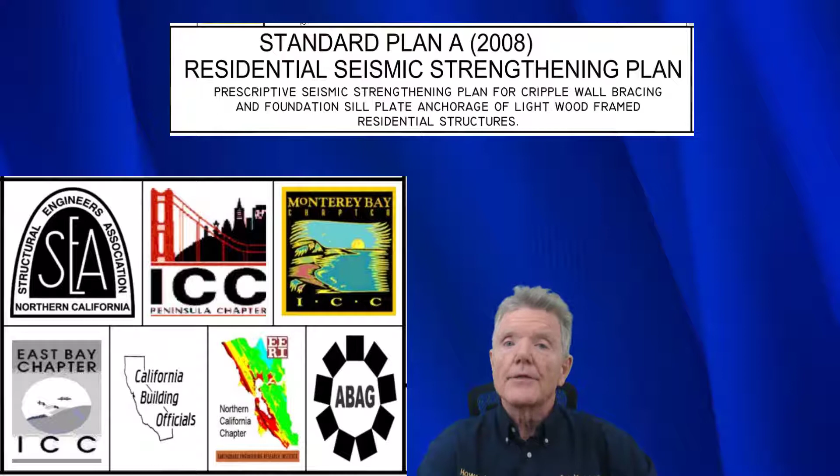I'd like to point out this is a very, very important document. It's been used by the California Earthquake Authority. The city of Berkeley also finances retrofits with this. The city of San Leandro teaches a course to contractors and homeowners, and it's used throughout the Bay Area. The city of Hayward actually is starting to require its use.

It came out about 2006, so it's been almost 14 years that it's been used extensively throughout the San Francisco Bay Area, and literally millions of dollars has been spent, much of it public money.

So if tens of millions of dollars are being spent by the public as well as by private individuals to protect their homes using this particular standard, you would really want to make sure that it is as effective as it can possibly be. The purpose of this three-part video is to see if it is as effective as it can be and if it needs any improvements.

Right now, we're going to go over some basics. In order for you to understand Standard Plan A, you need to understand some basic concepts. So we're going to go over what foundation bolts do, what plywood does, and also something called shear transfer ties.

Once you have that basic information, then I'm going to compare two houses. One of them I'm going to use Standard Plan A, and one of them I'm going to use a custom design system, which is what we use. The Standard Plan A one, you're going to see how it takes almost twice as many retrofit components compared to one that is custom designed like we normally do, and it's based on science.

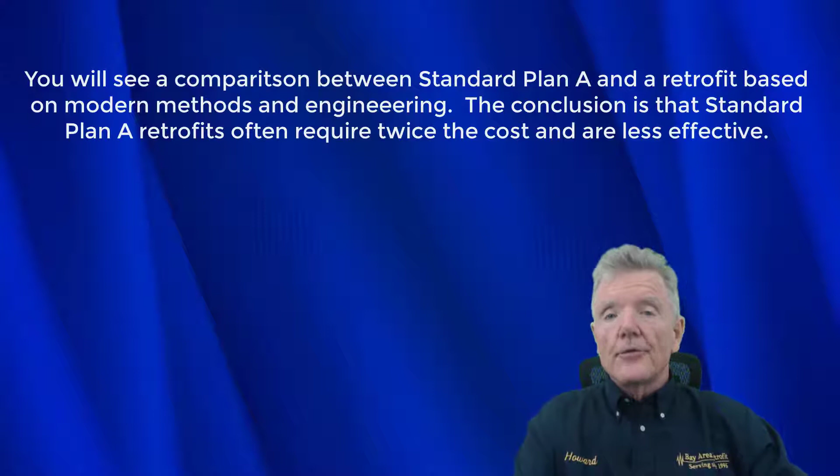Then for the rest of the video, which is about 25 more minutes, it's pretty long, I'm going to show you the science behind what I'm telling you and why, and I'm going to prove to you that what I'm telling you is true. So let's go ahead and take a look at the basics, and we'll go from there.

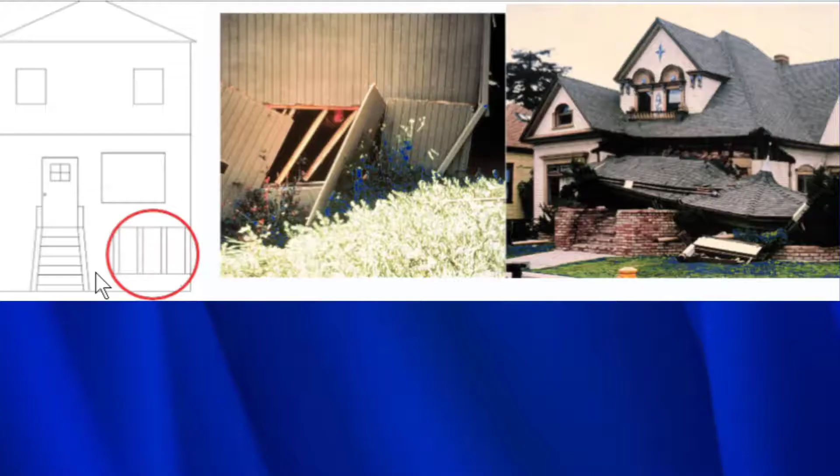The main purpose of Standard Plan A is to prevent the damage to homes that have cripple walls. Cripple walls caused a lot of damage in previous earthquakes when they collapsed. A lot of people became homeless, a lot of people lost their lifetime savings. I'm going to show you exactly how Standard Plan A attempts to do that.

First we need to understand what a cripple wall is. This wall right here is a cripple wall, and it's a wall that's between the foundation and the floor that you walk around on, and if they collapse, you can end up with this situation right here. This is the floor of the house where you would be walking around, and it's rocking back and forth like that.

Let's say the house weighs 100,000 pounds. It rocks back and forth, and it just can't handle that much weight rocking on top of it, so the wall collapses. The point of a cripple wall retrofit is to make sure that this wall is strong enough so that it does not collapse like that and keeps the house attached to the foundation.

Now, this is what happens when they fall off the foundation. You can see here, there used to be a set of stairs that go up here to the front door, but the floor is actually way down here, so you can tell it probably fell 3 or 4 feet off of its foundation.

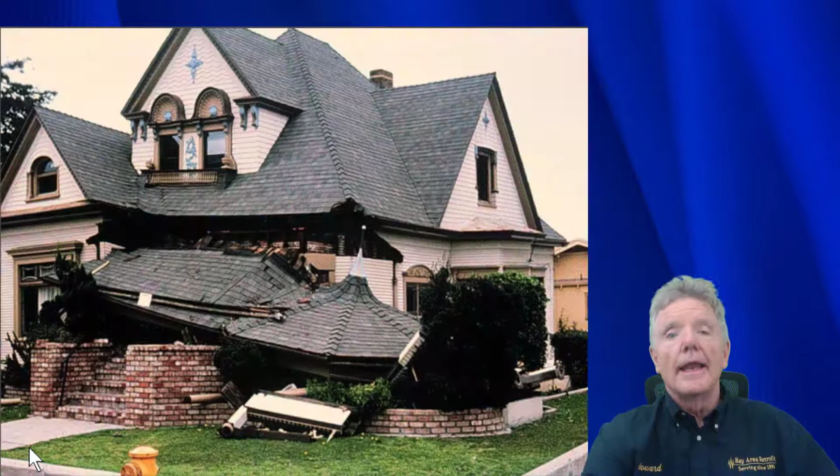This house right here, actually, I was the FEMA inspector who came in and looked at this house after the 1989 earthquake, and it was a big mess. The plumbing was torn out, the plaster was everywhere. It was obviously just really screwed up, and it was even more screwed up on the inside.

And so I went over and did the documentation I had to do, and then I came by a week later and the house was gone. They had bulldozed it, hauled it away, and the people who had lived there, I don't know what happened to them, but there's probably a house there now, but they lost it.

The point of Standard Plan A, and these government bodies putting Standard Plan A together, is to keep homeowners from having to go through this ordeal by giving them something simple to work with that uses the plywood, bolts, and shear transfer ties we just looked at in an intelligent way, to make sure they can get their houses retrofitted properly.

So we're going to look at basically what they're trying to do, and then primarily we're going to look at the plywood connection, because that's the number one factor in a good retrofit is a good plywood connection, and most of this video is going to be about that.

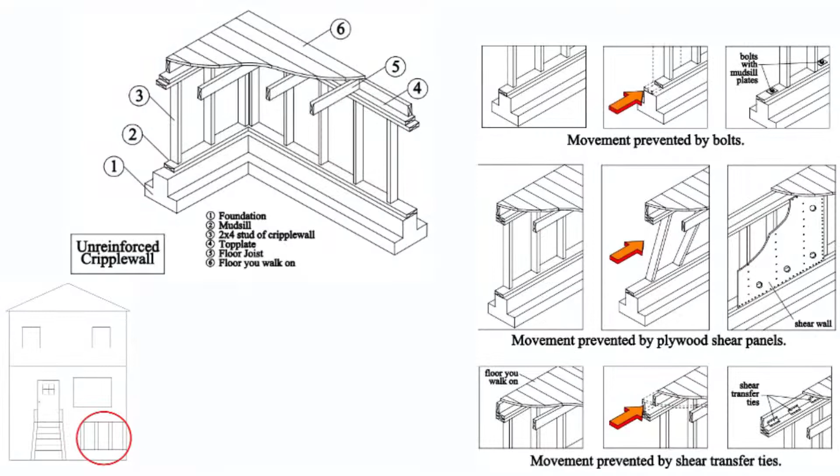So right now we're going to go into the technical parts of Standard Plan A. Remember, this right here is the cripple wall, and we're going to try and keep that from collapsing. Now this is the cripple wall in its entirety, if you were to be underneath the house looking at it. Here's the floor that you walk around on. This is the cripple wall itself, and this is the foundation.

We're worried about this piece of wood right here sliding on top of the foundation, and we fix that with bolts. The other thing we're worried about is this piece of wood called a floor joist sliding on top of this piece of wood, which is called a top plate. Now let's go ahead and see how that's done.

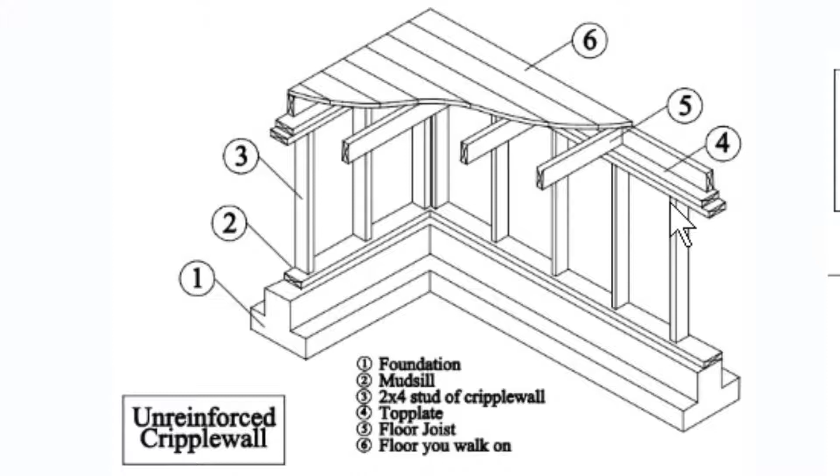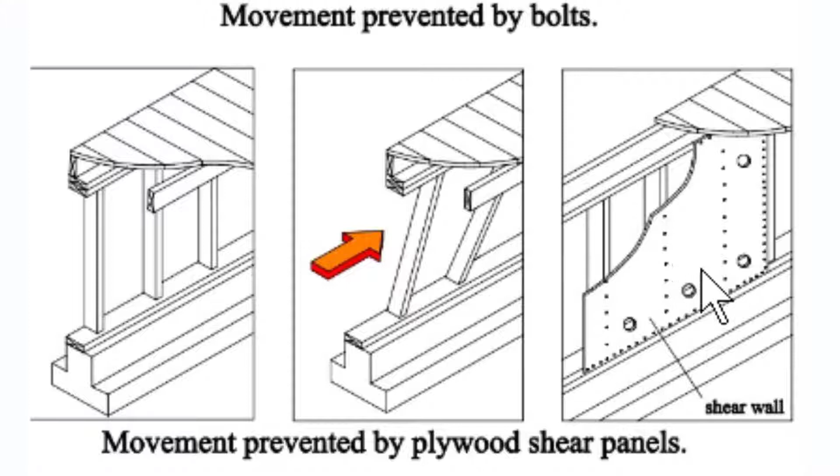So if you come over here, you'll see that here's the cripple wall. It's just standing there like it's supposed to. Then the earthquake force comes this way and it tries to knock it over like that. And it's a pretty easy solution: all you need to do is put some plywood on the cripple wall, and that solves that problem.

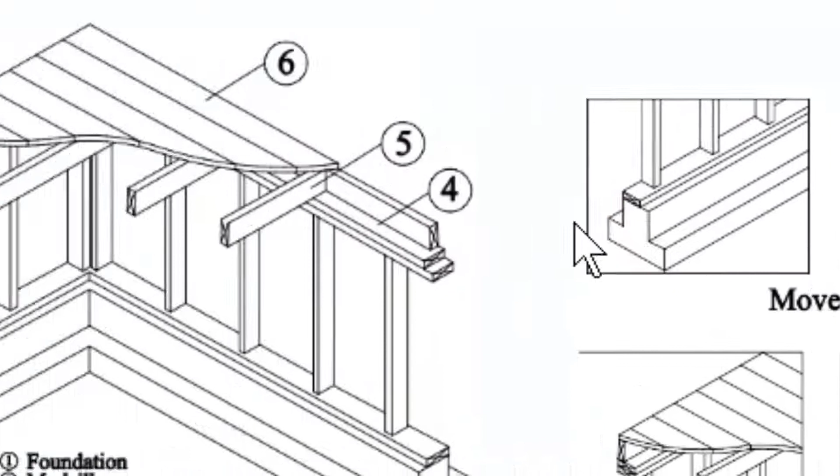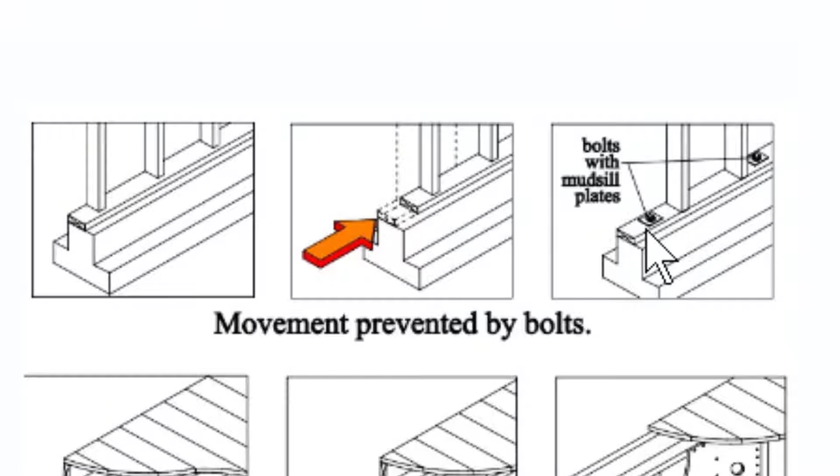Now the next one we have here is the bolts. So this is the mud sill, it's just sitting right here, as you see it right here. Remember, that's the bottom of the cripple wall. Earthquake force comes this way, tries to push it off like this, and then we simply bolt it to the foundation. Now on the top, we have the same problem with sliding.

So here's the floor you walk around on. This right here is the floor joist. And we want to make sure that when the earthquake force tries to push against it, it can't move. You see how this dotted line shows how it's moved a foot or so. We want to make sure it doesn't move.

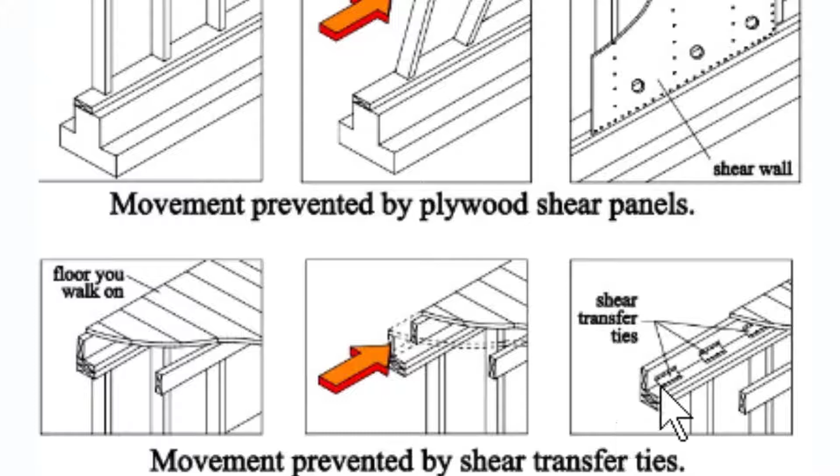And so we use these, called shear transfer ties. You can see right here, that's a piece of metal here, and a piece of metal here, and a piece of metal that will keep that from sliding when an earthquake hits.

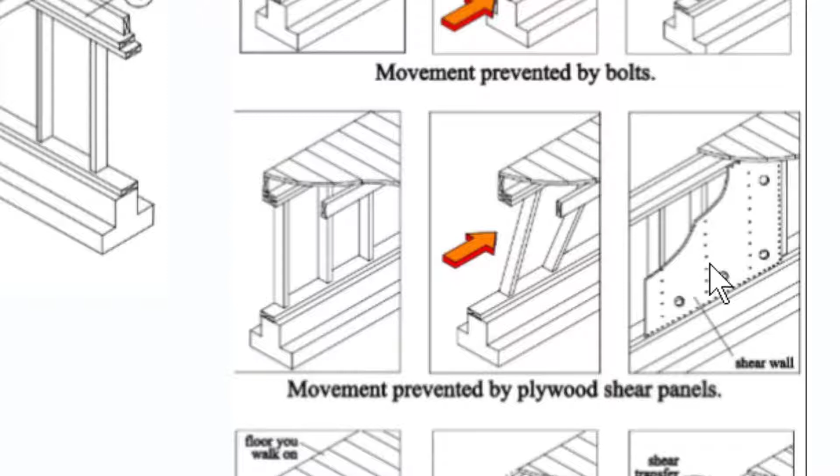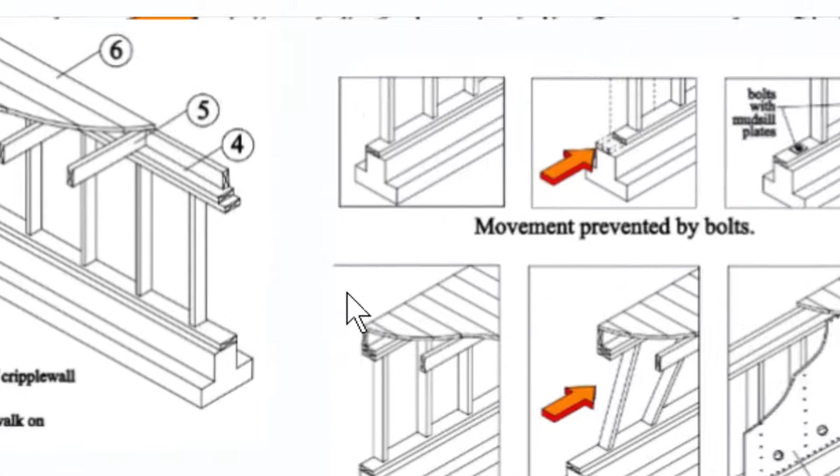So in summary, we're going to keep the cripple wall itself from collapsing by putting on plywood. We just nail some plywood to it. The next thing is we're going to keep our cripple wall on top of the foundation by bolting this piece of wood, called a mud sill, to the foundation. We do that right here with the bolts.

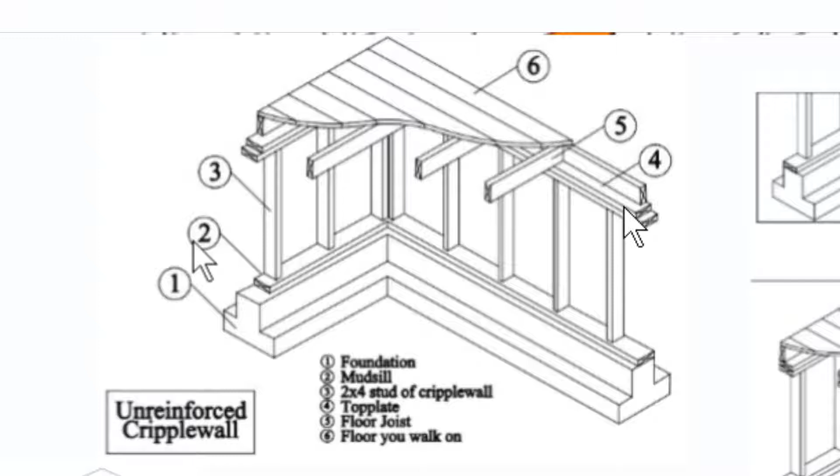And finally, we're going to keep the floor, which we're worried about moving on top of the cripple wall, by putting pieces of steel right here, connecting this piece of wood to this piece of wood, as shown right here with the shear transfer ties. Now Standard Plan A gives us a system by which we can take any house and figure out precisely how many linear feet of plywood we need, how many bolts, and how many shear transfer ties. We're going to go ahead and look at that part right now.

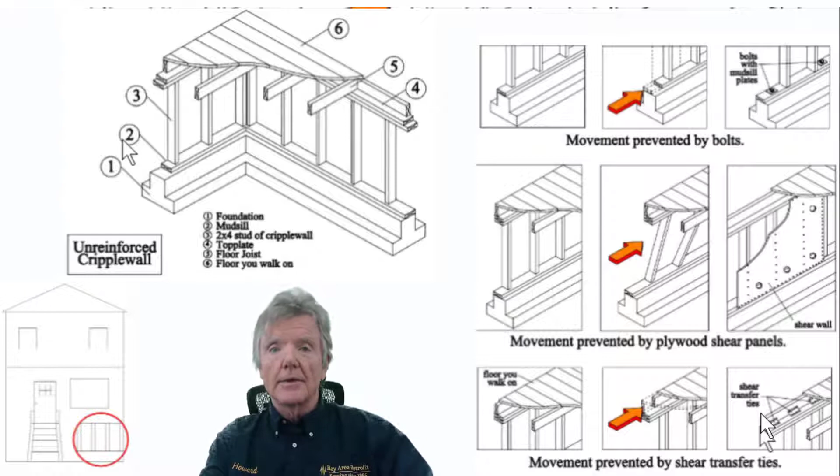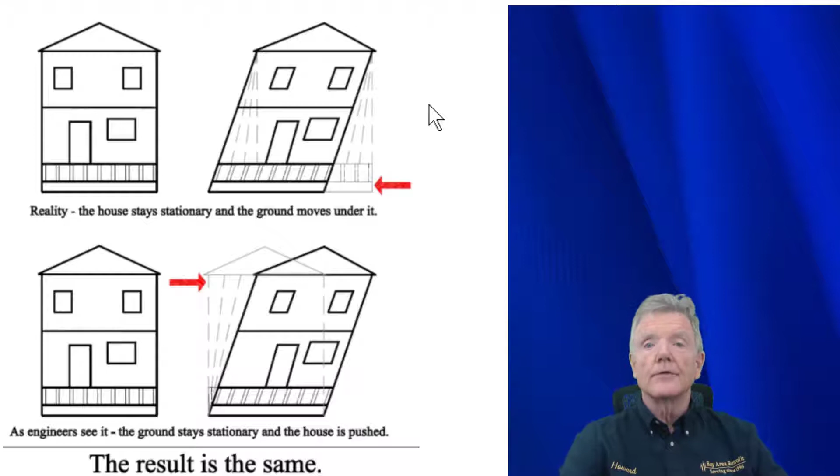And this is the technical part, and this is the part where you're going to see a lot of problems. In the world of seismic retrofitting, we're always talking about pounds of force pushing against a house and the pounds of resistance to make sure a house does not fall off its foundation. So let me show you how that works. Right here we have a ground acceleration that goes underneath the house.

The ground moves under the house, and you see how the house was originally upright. You can see that with those dotted lines. So it was originally upright, and now the ground is trying to move underneath it. Inertia is causing the house to lean, and is also going to want to cause it to slide off the foundation right here. And that's what a retrofit is meant to prevent.

Now look, this is the exact same thing as if an earthquake force were pushing against the house. You see how it is upright here, and then it gets pushed on, and then it's going to lean like that. So this image and this image are identical, except one is caused by earthquake force moving underneath, one is caused by earthquake force pushing. Now that pushing force is rated in pounds of force.

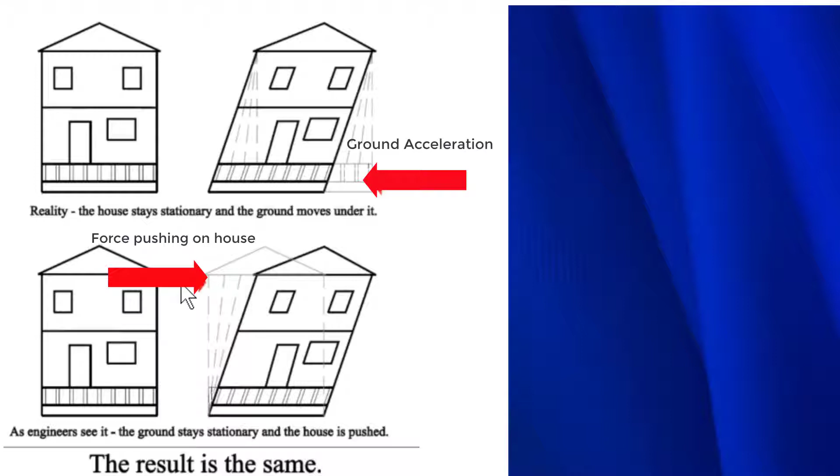So all hardware is designed to resist a certain number of pounds of force. That has to do with plywood, bolts, any type of hardware at all. So what we do in every single retrofit is we figure out what the pounds of force will be, and then we figure out what type of hardware we'll need to install to resist that same number of pounds of force.

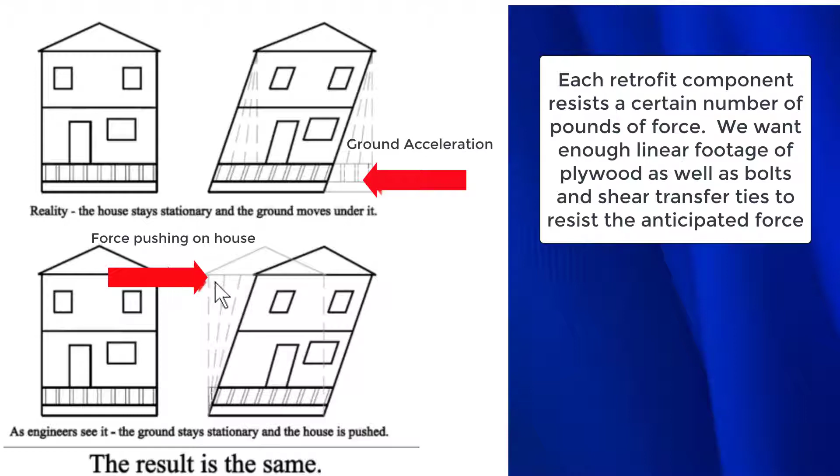So basically it works like this: this ground acceleration, we translate that into pounds of force pushing on the house, and then we take that number and come up with the hardware we need. So in Standard Plan A and the other retrofit guidelines we're going to look at, they used a nailing pattern on the plywood such that it would resist 380 pounds per linear foot. Let me show you where that came from.

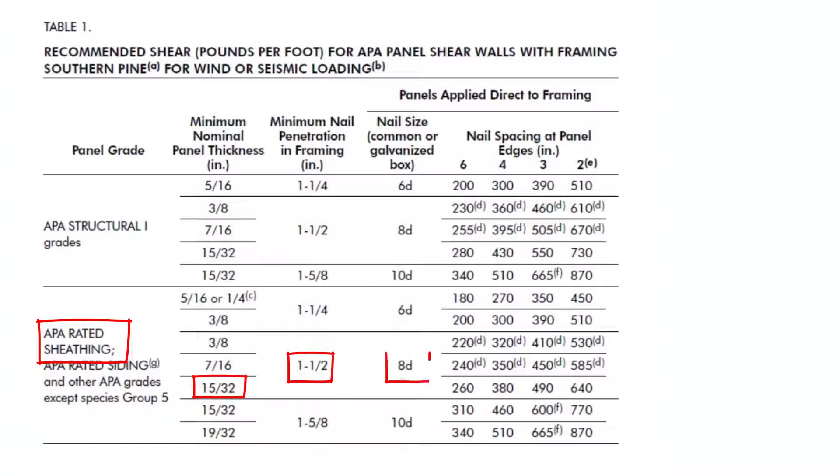This is a table from the building code that Standard Plan A used when determining how much strength the plywood should have. It has a panel grade of APA rated sheathing, 15/32 thick, which is the same as 1/2 inch. The nails will penetrate 1.5 inches, the nail size will be 8D - that's simply a type of nail - and the nail spacing at the panel edges will be 4 inches apart. When we put all that together, we end up with plywood that can resist 380 pounds per linear foot.

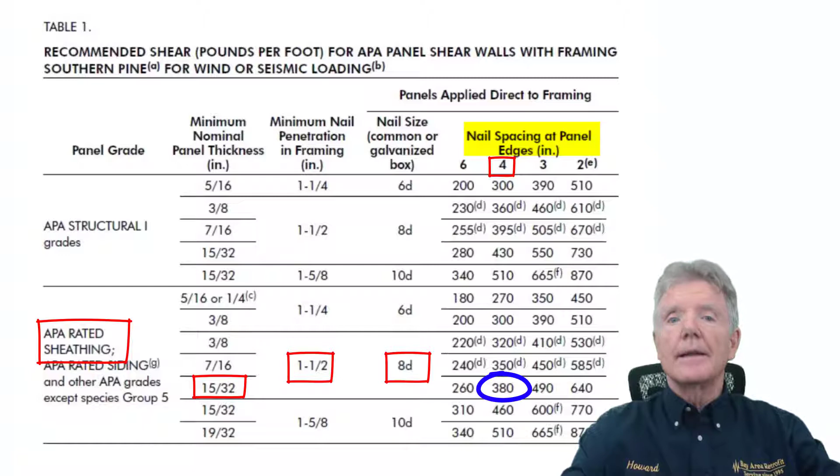There's a table in Standard Plan A that looks like this, and it tells us how to figure out how many linear feet of plywood we need to put on each side of a house to consider it retrofitted. The first thing we look at is the square footage of the house. We come down this chart, there's all these options, and in this case we're going to say we're looking at a 1,200 square foot house.

The next thing we look at is what it's made out of. So for that, we come up here and look: is it stucco on the outside or plaster on the inside? Either one of these variables will put us into what's considered the heavy category. So now we have a 1,200 square foot house, and it's heavy because it's stucco on the outside or plaster on the inside. We come over here and figure out the linear footage of plywood on each side of the house.

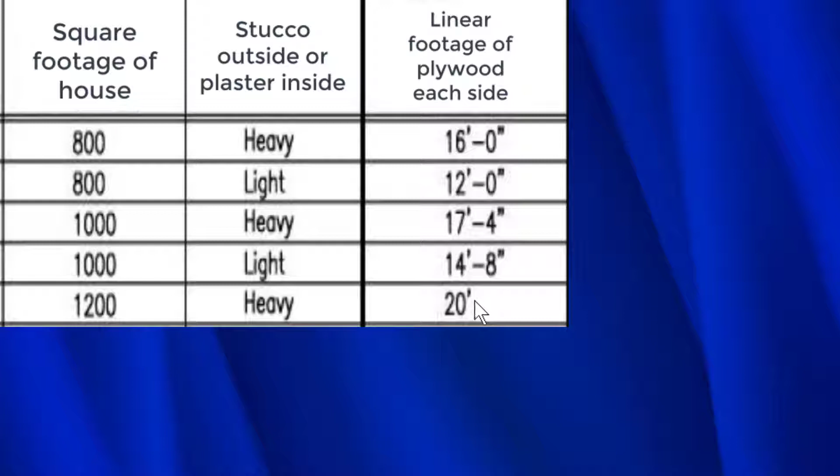We come down right here and we end up with 20 linear feet of plywood. So that means each side of the house must have 20 linear feet of plywood to be considered retrofitted according to Standard Plan A's standard.

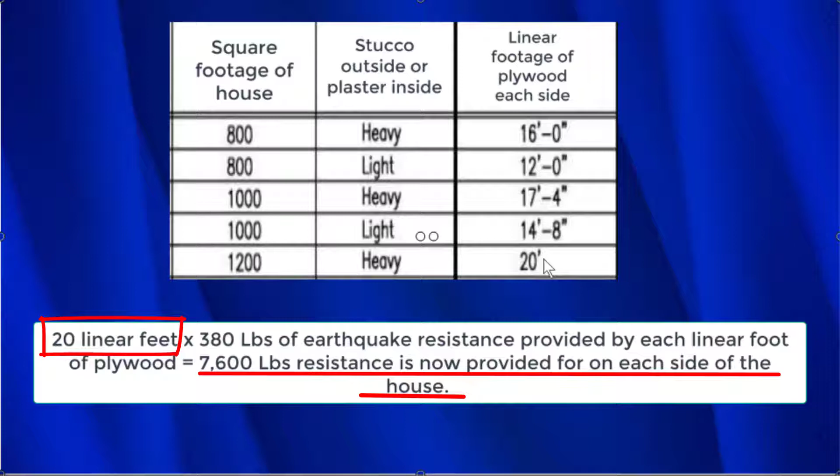So to see what they're trying to achieve from an engineering point of view, we just take that 20 linear feet and multiply it by 380 pounds of earthquake resistance provided by each linear foot of plywood, which we just looked at, and that gives us 7,600 pounds of resistance now provided for on each side of the house. So that 20 linear feet is put there so that the house can resist 7,600 pounds of earthquake force pushing on it on all sides of the house.

So naturally, it's important that the nailing of the plywood in Standard Plan A provides 380 pounds of earthquake resistance per linear foot. We're going to look very carefully at that and see if it has in fact done that. And before then, we're going to go ahead and look at some other guidelines and see how they nailed the plywood and see if Standard Plan A and these other guidelines are the same.

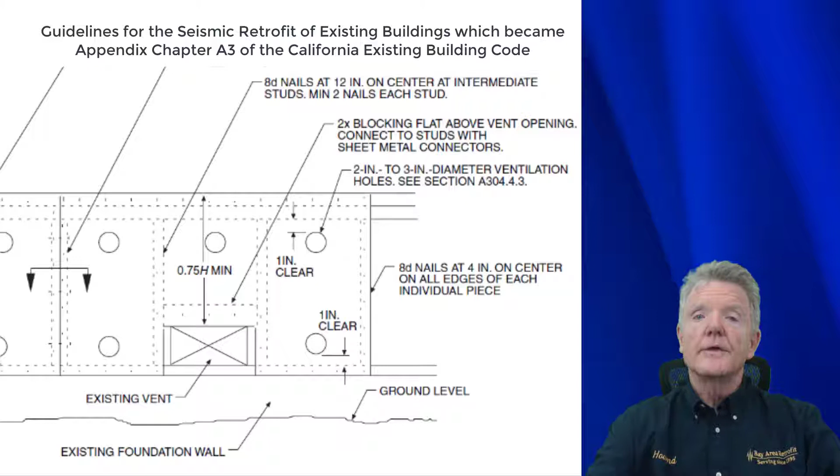This is the first instance I'm aware of where there was a construction detail that showed nailing of plywood in an official document. This comes from the guidelines for the seismic retrofit of existing buildings, published by the Structural Engineers Association of Southern California, I believe in the 70s. It was quite some time ago, and I was given a copy when I went there for a seminar in the mid-90s.

And the reason I'm so aware of it is that I remember looking in the front and there was a list of the engineers who had put it together, and I thought, man, I sure would like to meet those people. The chair's name was Jim Russell, and I happened to track him down. He lived in the Bay Area at that time. So I did some work with him.

I showed him some work that I had done, and he looked at it and thought I was doing some pretty good work there. Then I told him about some problems I saw out in a lot of the designs I was seeing, especially done by contractors and engineers. It just wasn't making any sense from what I saw underneath the houses I looked at. I made him very aware of this, and he just said, hey, let's put the Standard Plan A committee together.

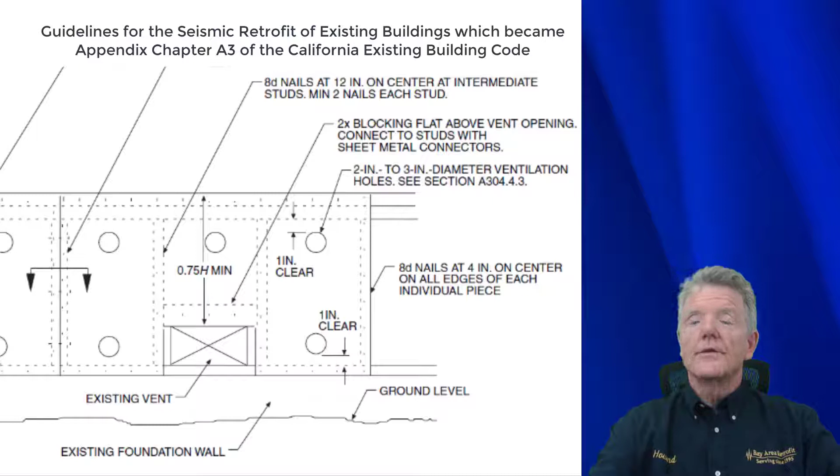Got a bunch of building officials and all these organizations that I showed you earlier, and they all got together and we made Standard Plan A. So this is the first place you'll see it, and it is so interesting that he was the chair of the committee that also put together Standard Plan A.

So these original engineers in Los Angeles, some really, really high, really good people. You might know some of them. Ben Schmidt was one. Nels Roselund, who trained me, was one. Really great, excellent engineers. But anyway, they put this together, and let's go ahead and see what exactly it is that they did.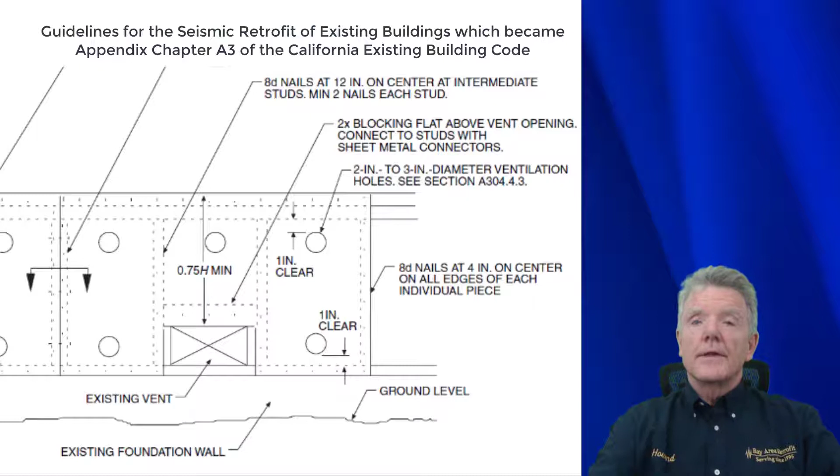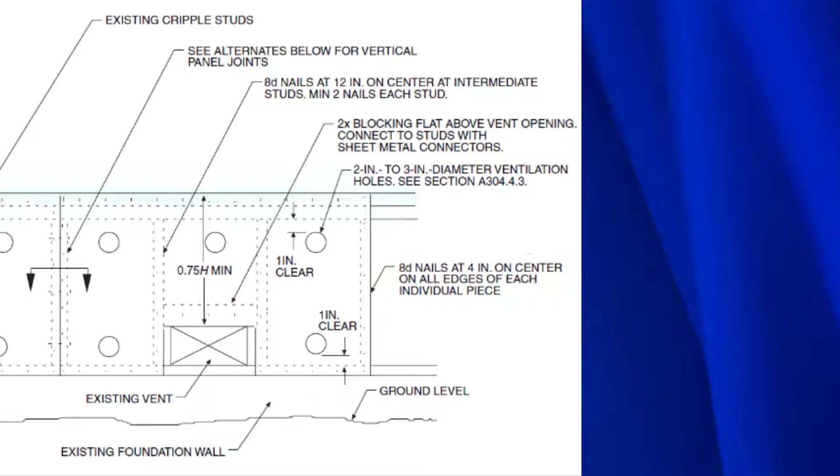So the main thing here is we see that the 8 penny nails are 4 inches on center on the edges of each individual piece. That means each piece of plywood will be nailed like this. The really critical thing to know is this edge nailing right here. You see these little dots - a dot here, a dot here, a dot here - all those little dots represent edge nailing onto the plywood, on the edge of the plywood, just like it says here: all edges of each individual piece of plywood.

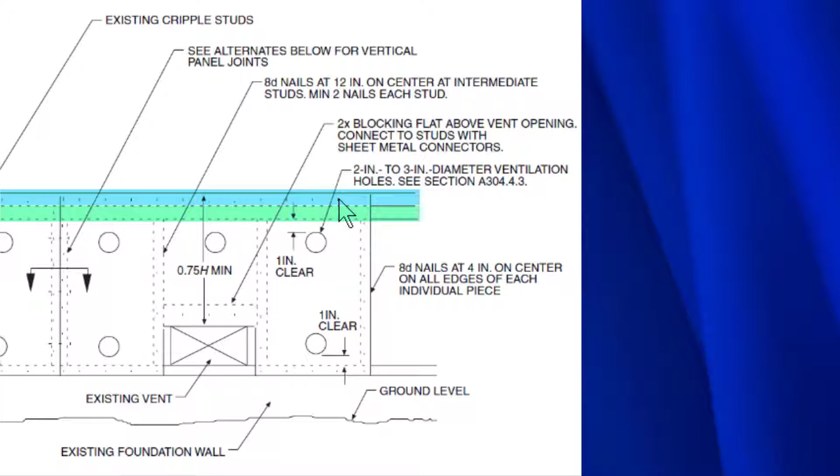Now there are 2 top plates here. There's the upper top plate right here, and then there's a lower top plate right here, and all the nails go into the upper top plate. That's what's so critical, and that's where we see a difference between this retrofit guideline and some of the other guidelines.

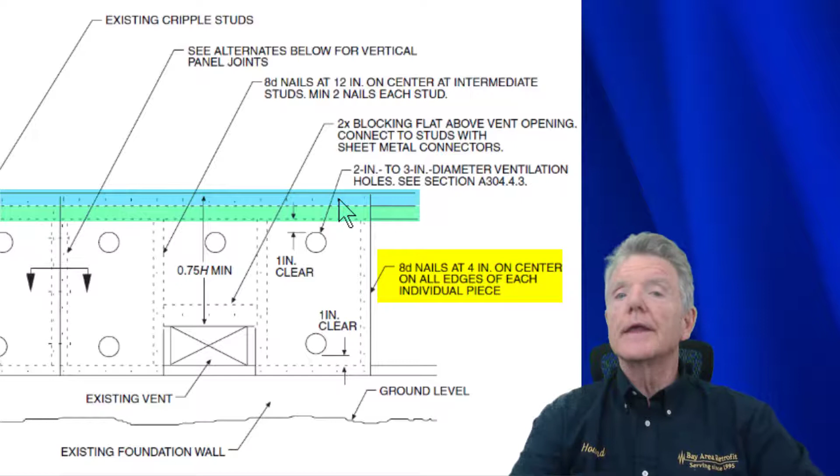So notice again how the plywood is nailed with 8D nails at 4 inches on center on the edges. That was the intent of Jim Russell when he put Standard Plan A together as well, and that's what we see in the California Building Code. Remember, we just looked at it, where if the nails were put 4 inches apart on the edges with 8D commons, we would get that value of 380 pounds per linear foot of resistance to earthquake. So that was the intent of Standard Plan A, and the construction detail for the plywood nailing should have been exactly like what you see here, and it's not.

To tell you how this happened is actually pretty interesting. Jim Russell, when he did the original calculations, he was the original chair of the committee. Well, he did the calculations and he got really sick. When he got really sick, he had to drop out. He didn't come to any more committee meetings, and it was taken over by a building official who was not nearly as conversant in wood frame retrofitting as Jim was. And so when he took over, somehow the construction detail changed.

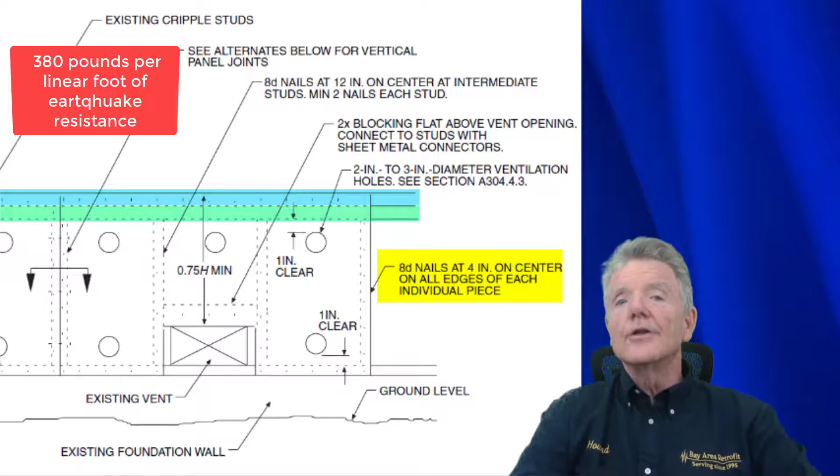So we don't have it. The construction detail of the plywood nailing does not look like this one anymore. It's nailed differently, and we'll take a look at that. But before we actually look at that one, we're going to look at what all the other ones are throughout the entire country. We're going to look at every single seismic retrofit guideline and see how they nailed it.

What we're going to see is that they all go back to this particular detail right here. They all have 8-penny nails at 4 inches on center on the edges, intending to provide 380 pounds per linear foot of earthquake resistance whenever they nail up the plywood.

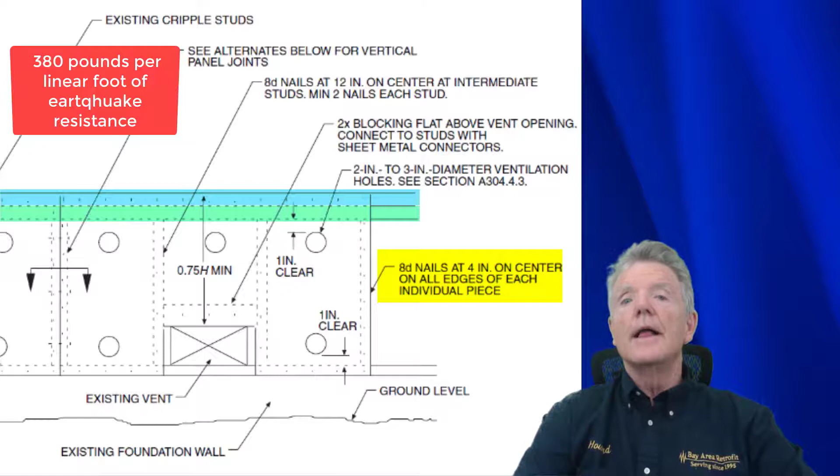So we're going to look at all that right now, and then check what it is that Standard Plan A did that was so different, and what a dramatic impact it had on the ability for Standard Plan A to be a premier retrofit standard.

In footnote 4 of table 4.4.1 in the 2008 Special Design Provisions for Wind and Seismic, it states that the nailing should go into the upper top plate only.

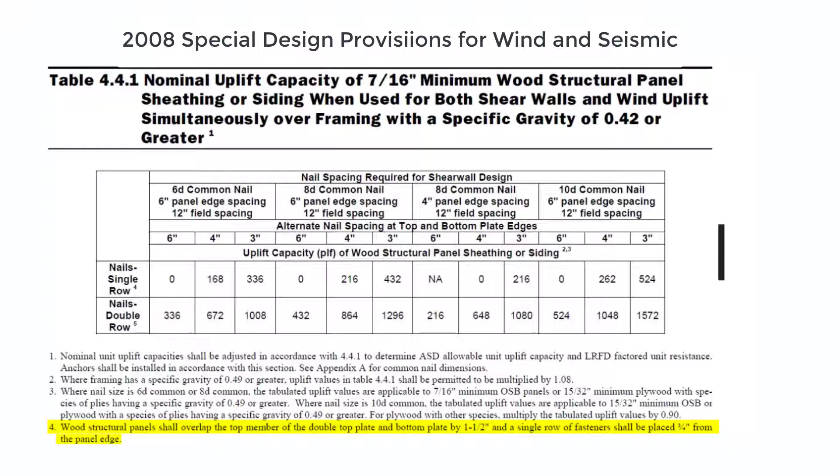Basically, wood structural panels shall overlap the top members of the double top plate and bottom plate by 1.5 inches, and a single row fastener shall be placed 3/4 of an inch from the panel edge. That means you're 3/4 down from the top of the plywood, going straight into the middle of the upper top plate, which is only 1.5 inches thick. So they're recommending 3/4 of an inch right in the middle.

American Plywood Association says 3/8 of an inch is okay, but subsequent tests have shown you actually get a little more capacity out of a 1/2 inch.

This provision permeates all the seismic retrofit guideline nailing patterns for plywood, because they do specify that the nailing should be in the upper top plate, except in Standard Plan A. We're going to see how that happened a little later.

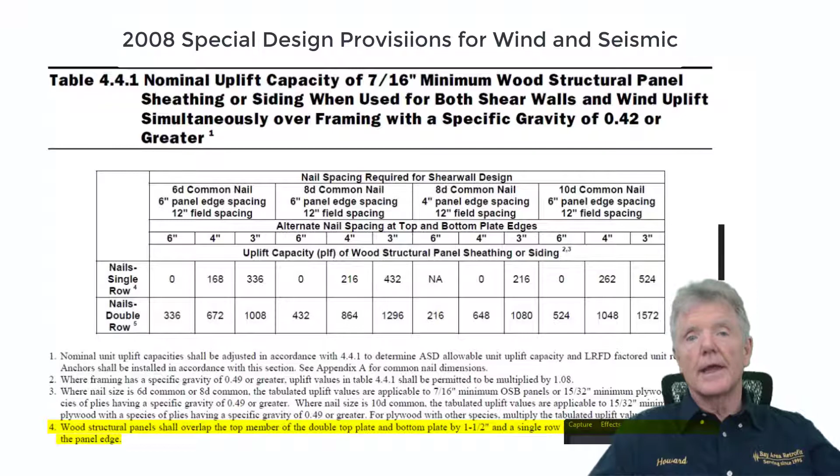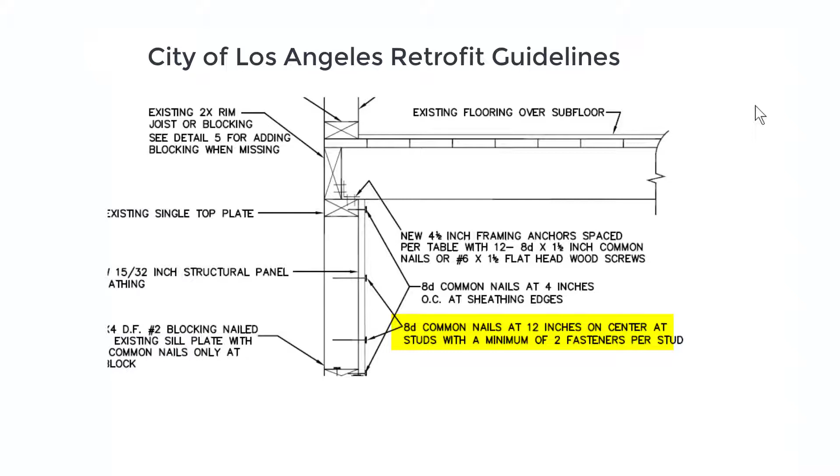Historically, this is the next retrofit guideline that came into existence in Los Angeles. Again, you can see it has 8D common nails at 4 inches on center at sheathing edges. OC stands for on center, or apart, and sheathing is the same thing as plywood. Again, this was intending to resist 380 pounds of earthquake force for each linear foot of plywood, just like we saw previously.

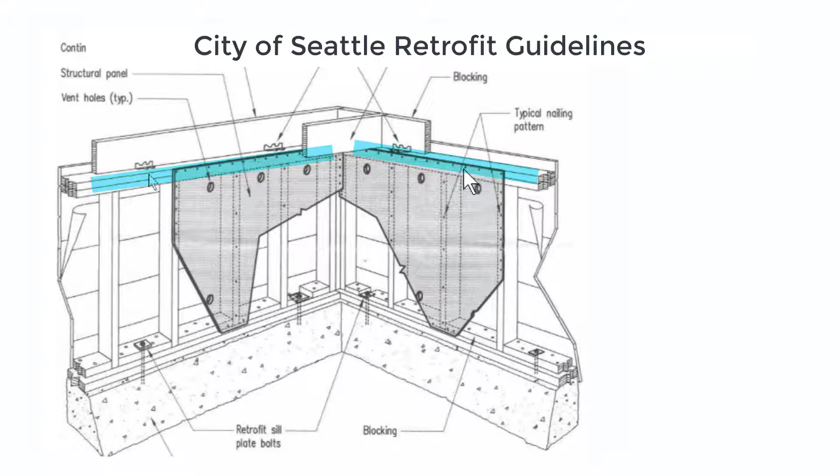This is from the City of Seattle retrofit guideline, and you can see here we have the exact same thing: edge nailing all along the upper top plate here and the upper top plate here. Even though I don't show it here, the nailing pattern again is 8D commons at 4 inches on center, just like the other guidelines.

This actually took the information from the original precedent of the California Existing Building Code guidelines for retrofitting existing buildings and made a new drawing, which I think is much better. It's much clearer because it shows the upper and lower top plate and the way it was nailed.

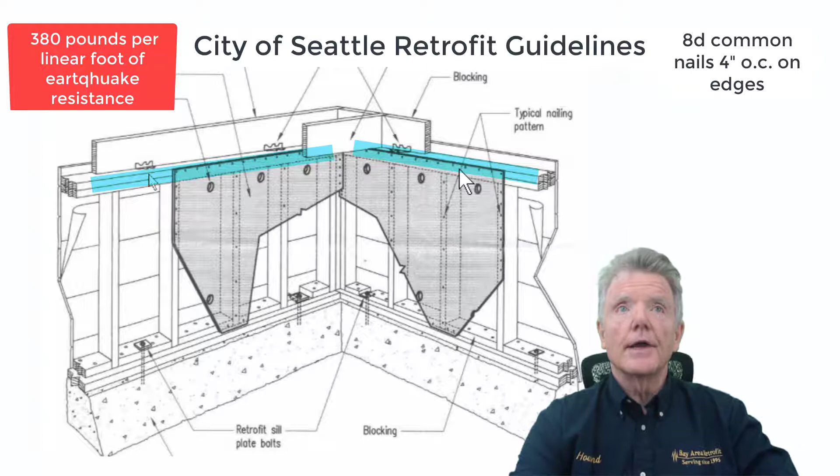It also shows the shear transfer ties. Notice the nails that go into the shear transfer ties in this direction, down into the upper top plate, only go into the upper top plate, which is why these nails here are only going into the upper top plate as well. So this framing anchor, also called a shear transfer tie, is connected to the upper top plate, and the plywood is also connected to the upper top plate.

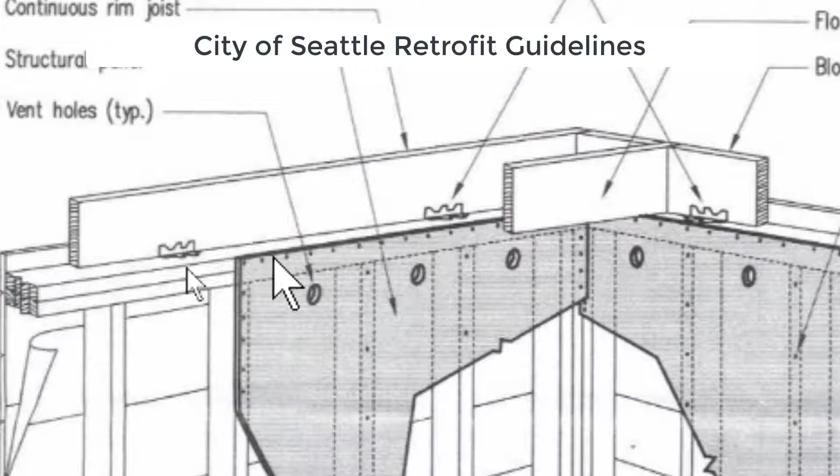We're going to see the reason for that when we actually take a look at the Standard Plan A detail.

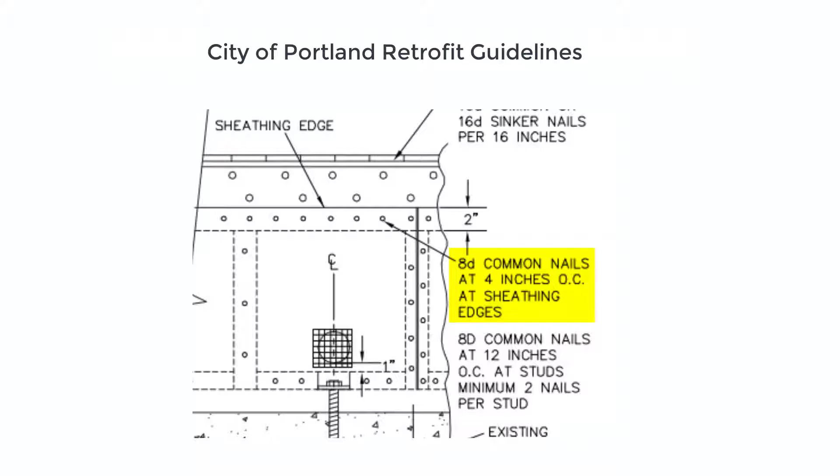This is from the City of Portland retrofit guidelines, and this construction detail is not very clear — it was actually lifted from the Los Angeles retrofit guidelines — but it shows the exact same things: 8D common nails at 4 inches on center at the sheathing edges, a nailing pattern supposed to resist 380 pounds of earthquake force for each linear foot of plywood.

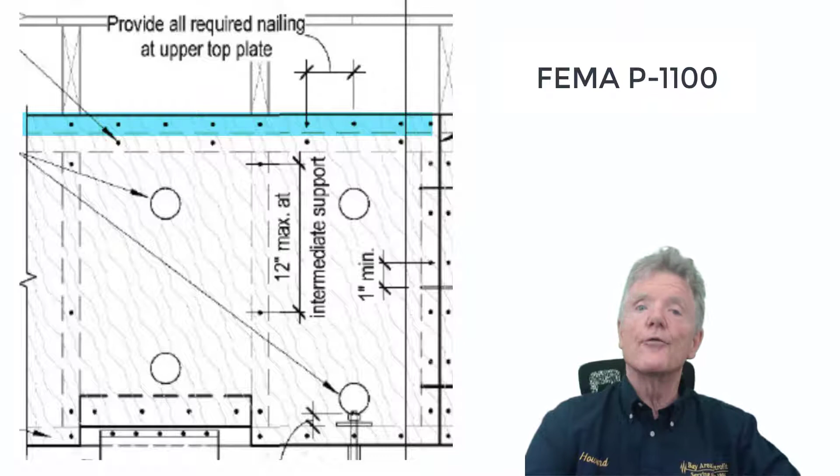This is from FEMA P1100, the most recent retrofit guidelines from 2019. You can see that the nailing is only in the upper top plate, just like it was for the guidelines for seismic retrofit of existing buildings published in the 70s or so. So we've gone back about 50 years to the way it originally came out and the way Jim Russell originally intended this plywood nailing to be.

You can see it very clearly here: it says provide all required nailing at upper top plate, and you see the nails right across here along the upper top plate very clearly.

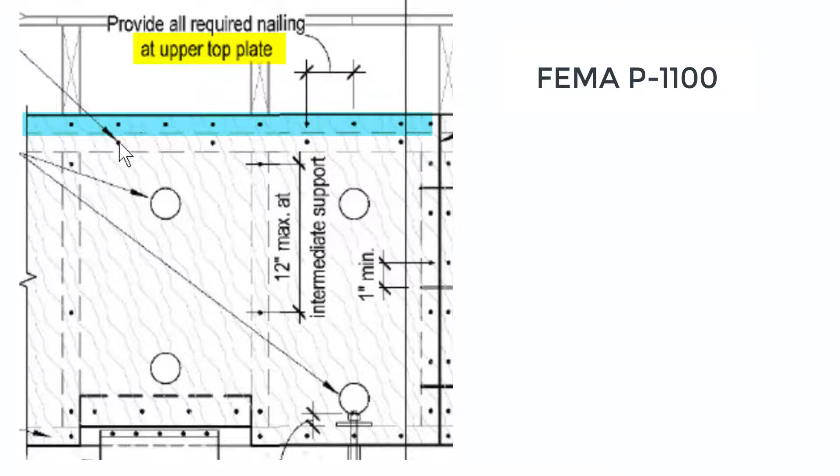There are a few nails here at the bottom. There's one here at this lower top plate, one here, and I was curious about this, so I talked to the engineer who helped put P1100 together and asked her why those were there. She said she really had no idea at all, but there was another engineer involved and she would ask him and find out. I never heard back from her, but apparently it certainly won't hurt, though they're not required.

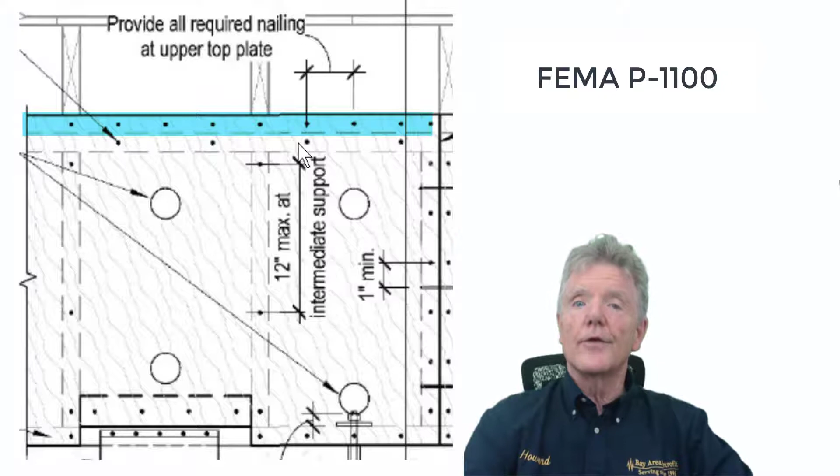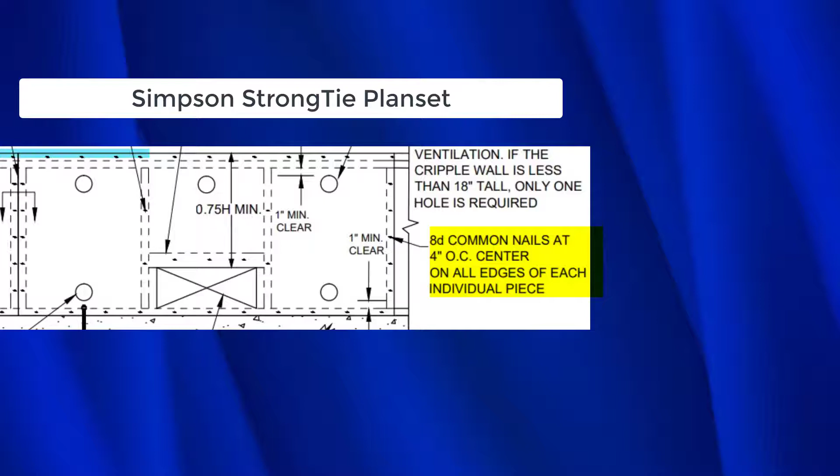So anyway, what you see here is what Jim Russell originally intended for Standard Plan A. Many people may not be aware that the hardware manufacturer Simpson Strong-Tie also has a plan set, and it's just like all the others. As you can see, we have 8D common nails at 4 inches on center on all edges of each piece of plywood, and all the nailing is on the upper top plate. Again, this is to resist 380 pounds of earthquake force for each linear foot of plywood.

Now, for some reason, the Standard Plan A committee decided to change things. Jim Russell's intent was that nails should be on the upper top plate only, but for some unknown reason they decided to put nails on the upper top plate and the lower top plate. As I said, Jim got really sick, he wasn't able to see this to the end, and I'm sure he would not have approved this if he had seen it, but that's what we ended up with.

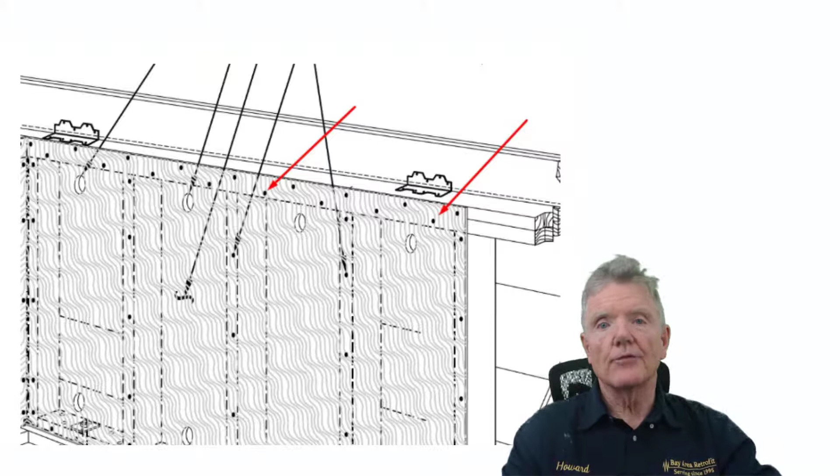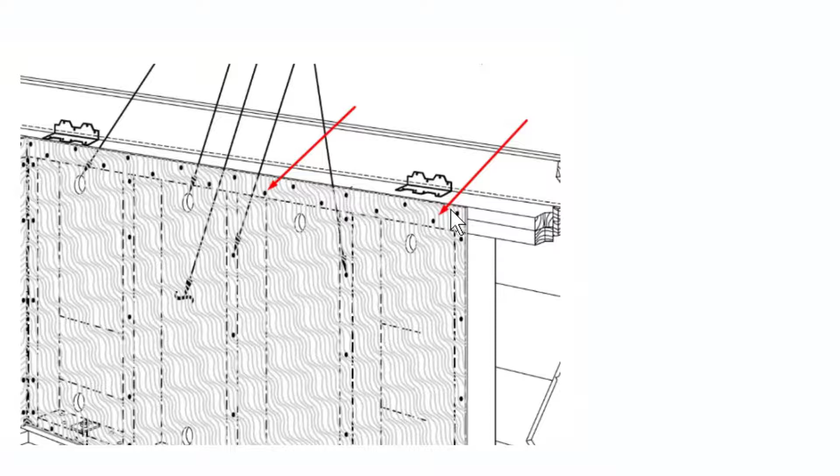Let me show you why it's such a problem. So this is our upper top plate, and this is our lower top plate. You see how these are 4 inches apart along each plate. Here we have one, then one right here, that's 4 inches, and one here, 4 inches, 4 inches, 4 inches. So in effect, along the entire upper top plate, you have a nail every 8 inches. Now, the building code does not even have a table that recognizes shear walls nailed on the edges every 8 inches. But anyway, that's what we got.

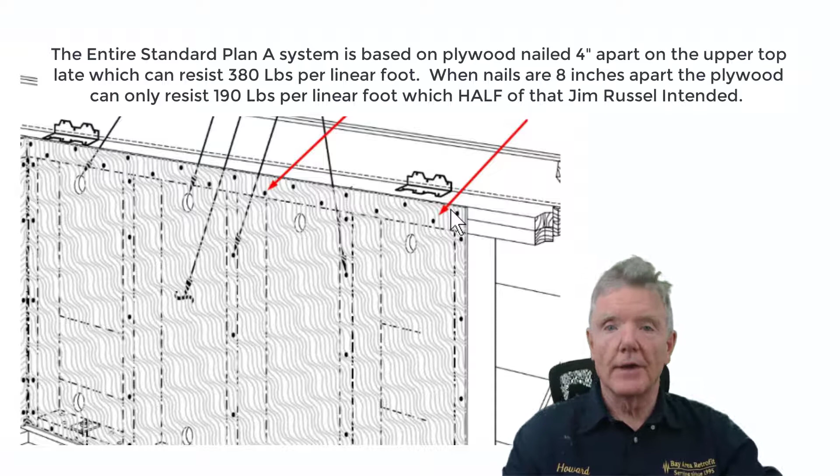So the way it would actually work is, this is a floor joist, and a floor joist is part of the floor — it supports the floor you walk on. When this slides this way, we want to keep that from sliding. So we take this piece of metal, called a shear transfer tie, and nail it to the joist right here, and then nail it down here into the upper top plate. Now, the upper top plate is only 2 inches thick, or 1.5 inches, usually 2 inches. The nails that come in here are 1.5 inches, so all the nails go into this upper top plate.

So what that means is, earthquake force comes this way, pushes on the shear transfer tie, that goes into the nails that are again only 1.5 inches. So that force goes into the upper top plate, pushing it that way. Then that force goes into the nails that are also in the upper top plate. Eventually, when this piece of plywood pushes on the top like that, the bottom of it also pushes that way into the bolts. So these nails on the lower top plate are not connected to the shear transfer tie — therefore they are not doing anything. So anyway, that is the problem with Standard Plan A.

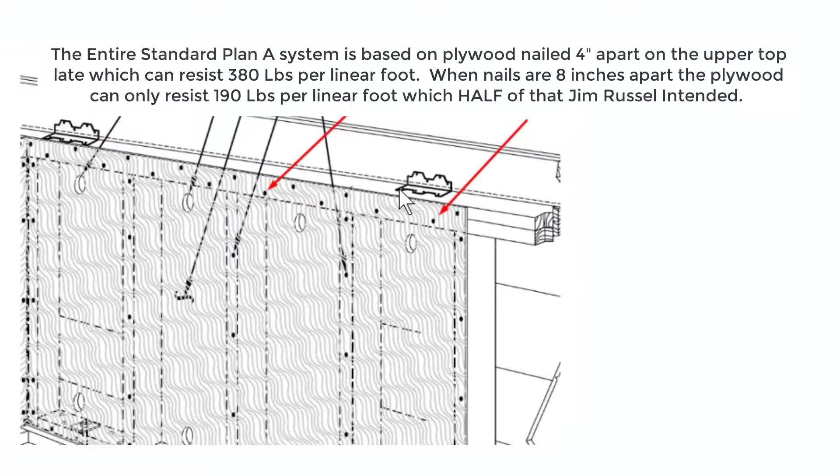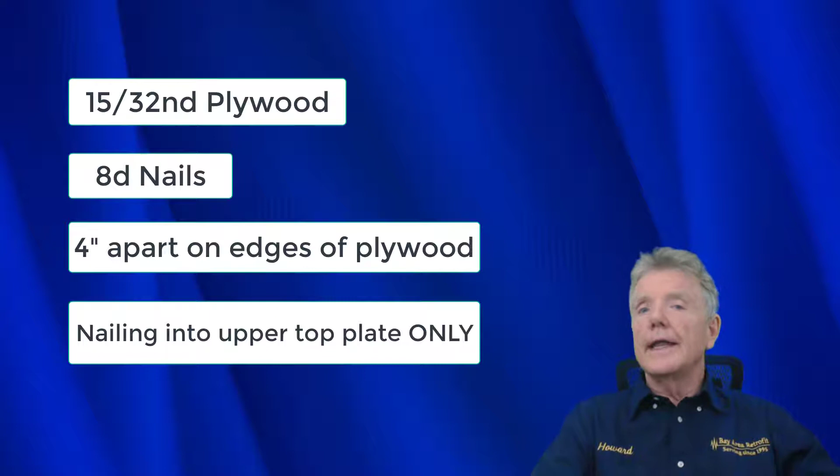As you probably noticed, all the retrofit guidelines ultimately refer back to Jim Russell's original work in the guidelines for the seismic retrofit of existing buildings as far as the plywood nailing goes. They all recommend 15/32 plywood, 8D nails, 4 inches on center on the nailing, and nailing into the upper top plate only. We don't see that anywhere else except in Standard Plan A, and also in this particular guideline I'm going to point out right now.

So the other guideline where we find the double top plate nailing is in FEMA DR-4193. As you can see here at the upper top plate, we have a nail every 8 inches. In the lower top plate, we have the exact same thing. So overall, the edge nailing is every 8 inches on this piece of plywood right here.

I talked to the engineer I work with professionally, one of the members who worked on this. I pointed this out to him, and he said, man, that was a big screw up. Only the nails in the upper top plate are going to do anything. He was apologetic, wasn't quite sure how it got past him, but it did.

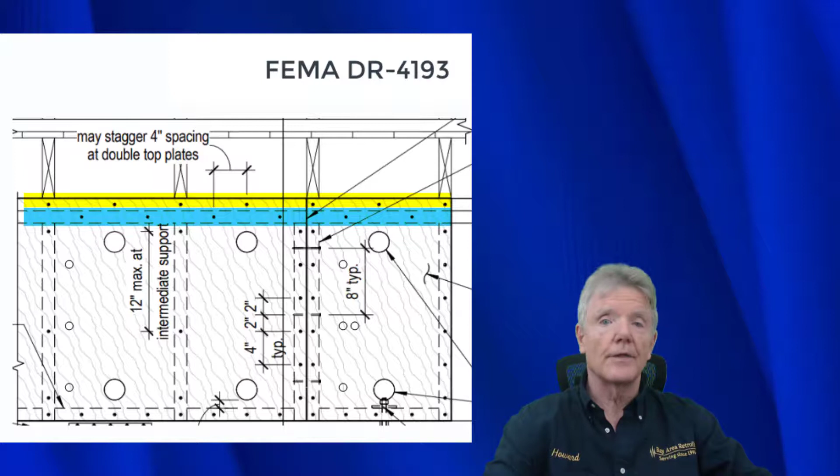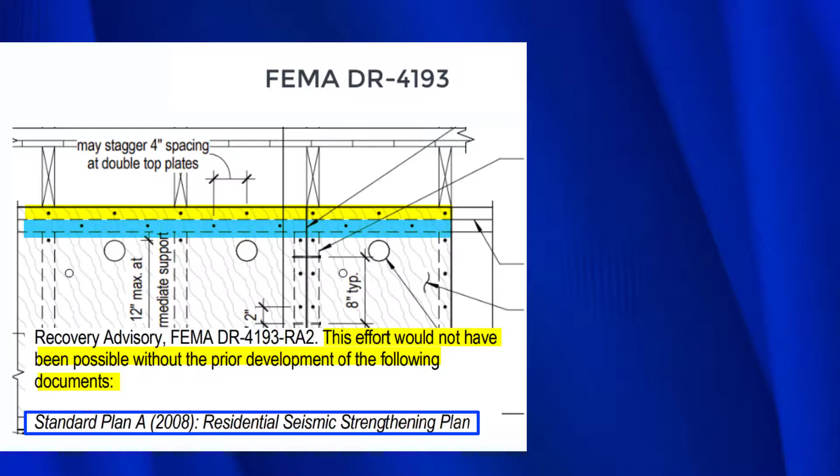The real reason this was even considered is because of Standard Plan A. Standard Plan A was a precedent, kind of like case law. It had already been hashed out in their mind. A bunch of people had talked about it a whole bunch, and they finally figured out that this double top plate nailing was a good idea. That's why it's allowed in FEMA 4193, which states this effort would not have been possible without prior development of Standard Plan A and the Residential Seismic Strengthening Plan. So that's why we find this in FEMA 4193 - it wouldn't be there otherwise.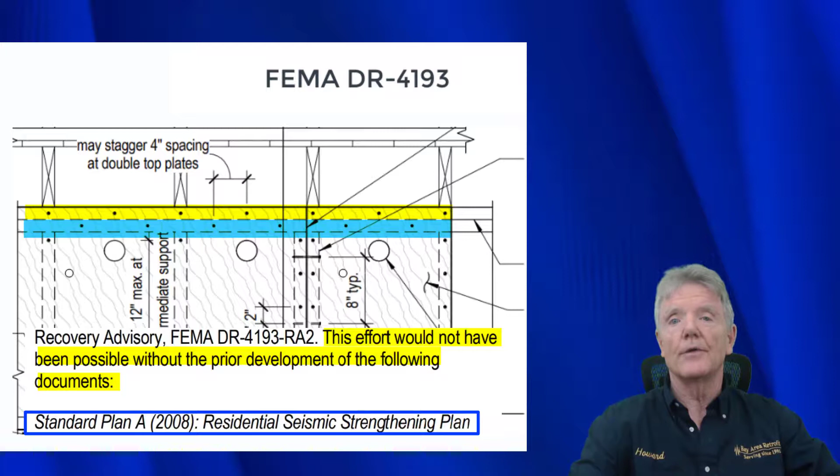So the real question is, where did this come from in Standard Plan A? What you continually see is that a certain standard will influence the development of another standard, which is what it should do. In this case, Standard Plan A was influenced by another document, but it was not a code document, not even a government document - and we'll see what that is right now. This is the first case where I could find nailing in the upper and the lower top plates.

This comes from the Simpson Strong-Tie catalog. This detail was in their publication from 2007 for homeowners retrofitting their homes, and it's what they use to sell hardware. The manufacturer, the people who drew these, didn't know anything about engineering or retrofitting. He just put this detail up, and it looks nice - even the extra nailing at the top is attractive. This must have been used by the people putting Standard Plan A together, because there's no other way they could have come up with this. There's just nowhere else you find it.

There's no code references - not in the California Existing Building Code, not in the Los Angeles Building Code. There's no precedent for it. So the only explanation I have is that.

The interesting thing is, I do recall at one of the meetings the building official from San Leandro talked about how he had hired someone who worked for Simpson Strong-Tie, making their drawings like this for them. So either that person had already drawn a detail like this, or he was fully aware of it and would have had a tendency to draw the detail like this. That's why this detail is in Standard Plan A, and it's the only time you ever find it.

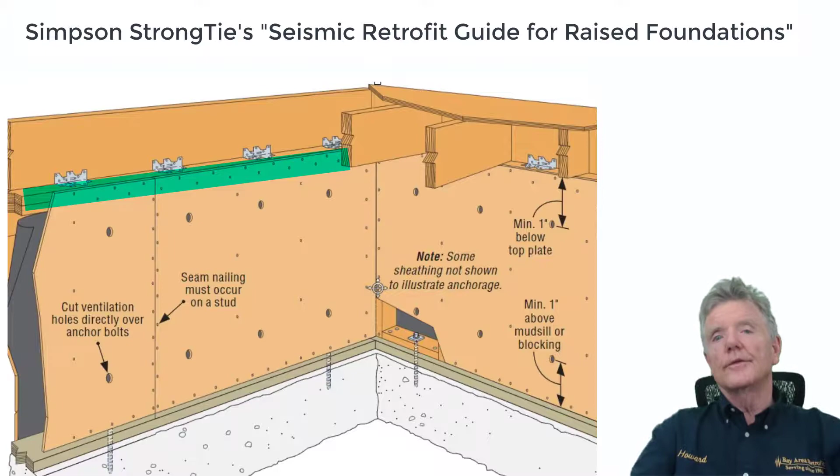Actually, it's a little crazy, because if you think about it, this was not put in because of any engineering expertise. When you get down to P1100, where there is true engineering expertise, as well as Jim Russell's original design back in the guidelines for retrofit of existing buildings and the California Existing Building Code, those are all rational. But this one just came about because of some quirk, some human error. This shows that even though it looks like scientists with white coats and microscopes writing codes, it's just human beings, and sometimes things like this just happen.

So here I've listed all the guidelines, showing which ones recommend the upper and lower top plate nailing, and the ones that recommend upper top plate only. The first case I found with lower and upper top plate nailing was in the Seismic Retrofit Guide for Raised Foundations, published by Simpson Strong-Tie. The oldest one I could find was from 2007. Standard Plan A's details were put together, I believe, in 2008 - that's the revision I have. So the only thing I can imagine is that in 2008 they were looking at this guide, and out of that they decided to put the upper and lower top plate nailing in. I have no other explanation. There's no engineering basis for this.

If you look at the other guidelines, at that time it would have been the Uniform Code for Building Conservation, which is the current appendix chapter A3 in the California Existing Building Code. They didn't get the information from there. There's no telling where that came from. The only source I can think of is that it came from that guide published by the Simpson Strong-Tie Company.

In FEMA DR 4193, it specifically states that they incorporated Standard Plan A into their plywood nailing. The assumption was that the committee in Standard Plan A had been debating this for years and decided it was the right way to go. But from an engineering point of view, there's absolutely no reason to have this upper and lower top plate nailing, and that's the only explanation I have.

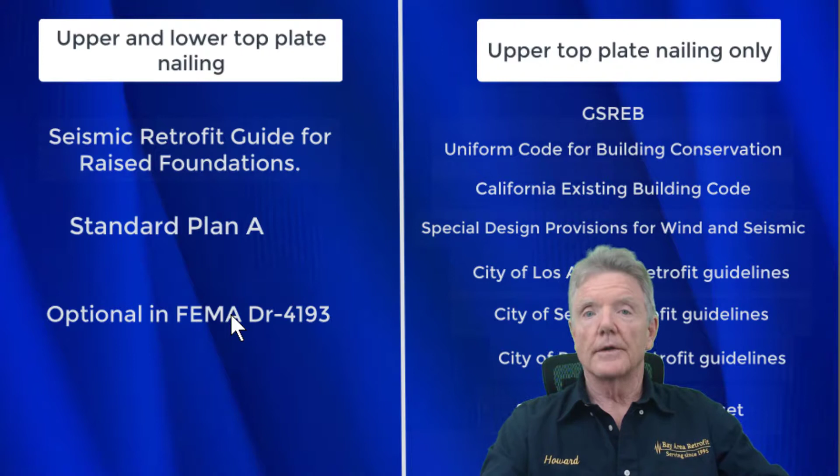So on this side, for the upper top plate only, we have the original guidelines for seismic retrofit of existing buildings, which eventually became part of the Uniform Code for Building Conservation, then went into the California Existing Building Code. And this right here is kind of a big deal - the Special Design Provisions for Wind and Seismic, published by the American Wood Council, which basically drives all code decisions regarding wood. Anything in there is considered sacrosanct. In that document, it recommended nailing into the upper top plate only.

Then we go down to all these other guidelines. The City of Los Angeles guideline was very heavily reviewed by some very high-powered engineers - Jim Russell was actually instrumental in that one as well. Then we have City of Seattle, City of Portland, and the Simpson Strong-Tie plan set. Now the really weird thing is that the plan set has different nailing than their retrofit guide.

So this right here would have just been done independently. This is when they actually had the engineers at Simpson Strong-Tie put this together, and it's very obvious when someone explains it to you why you should only put the nails in the upper top plate. So that's what they did.

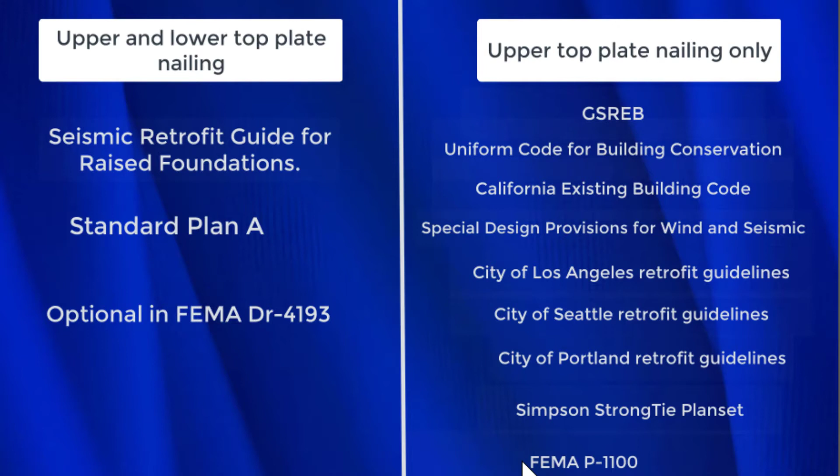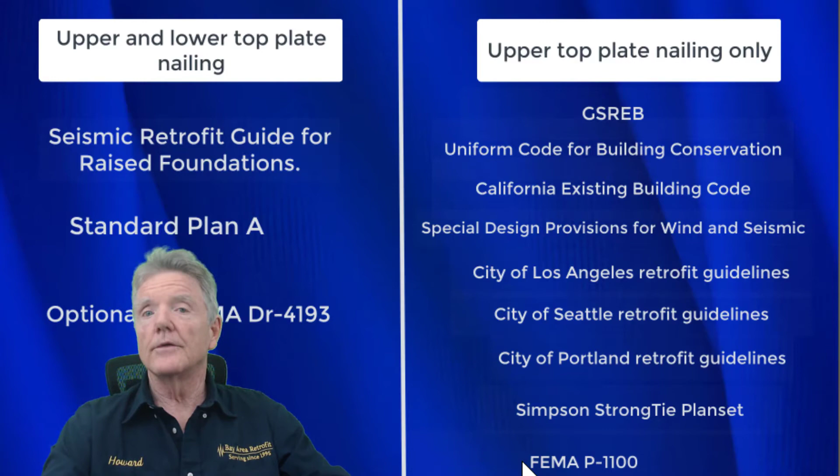And then finally we get the most recent guideline, FEMA P1100, which was also put together by some very competent engineers. They went back to what Jim Russell originally did in the Guidelines for Seismic Retrofit of Existing Buildings, and they put the nailing in the upper top plate only. So the big question is, what do we do with this information now?

I'm not sure exactly how this double top plate nailing ended up in Standard Plan A. I wasn't there when they actually put the details together. In fact, I wasn't even there for the 2008 revision, so I'm not sure what happened there. The one thing I am sure of is that it is very bad engineering, and that it's making these retrofits ineffective, it's making them expensive, and it really should be revised.

Hopefully the people who watch this video will agree with me and put some kind of political pressure somewhere to make sure things change.